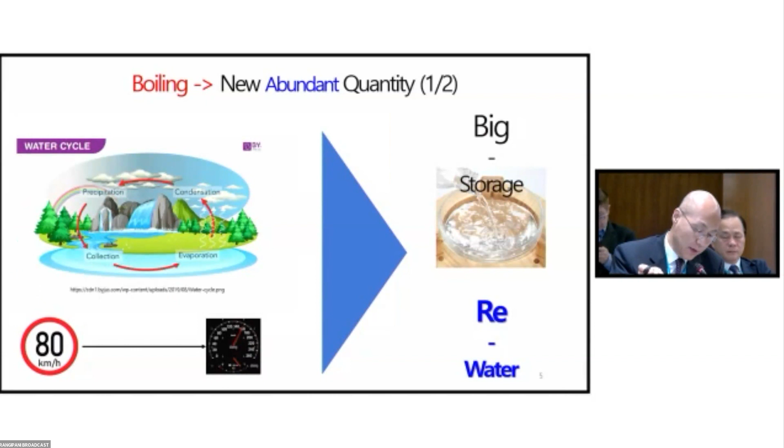Efforts are being made to reuse used water as a method to secure water resources, apart from the natural water cycle. I would call this produced reused water.

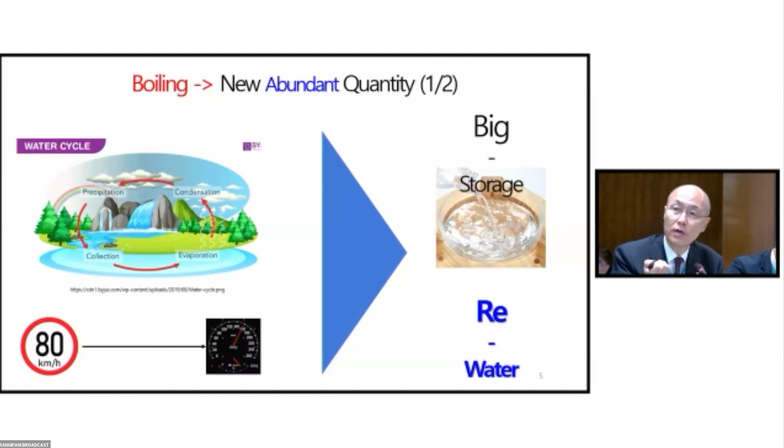I called this water re-water, and we try to keep the quantity of the water resources in the period of global boiling. We should use two methods. We make the big bowl, and the second one is we reuse the used water, which is called re-water.

To solve this issue, we need to increase the water storage capacity. There are 2 ways for this. One is to increase the number of water bowls and the other is to enhance their individual volumes: volume up, and increase the number of bowls.

And next, let me talk about water quality, new safe water quality. What would happen to water quality if the Earth is boiled over? Hot temperature would affect the aquatic system. I thought, what is happening when the river has a hot temperature? Which are the most utilized water resources?

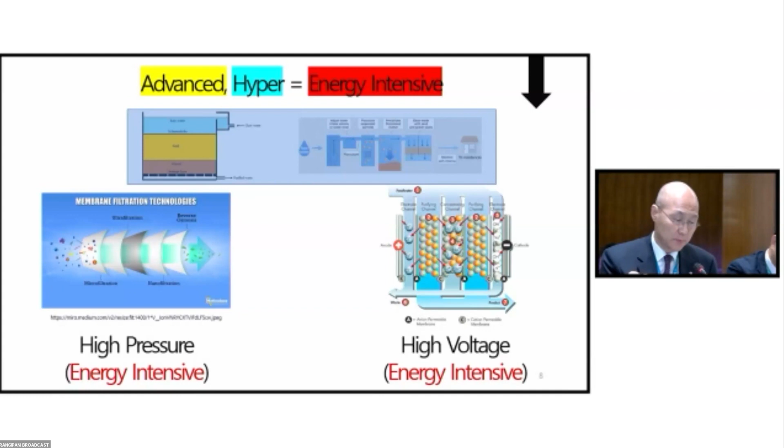And I think global boiling affects water quality more than quantity. To produce safe water, energy intensive processes are needed. In the global boiling era, I think research on water treatment technologies that use energy efficiently is needed to ensure safe water quality.

We water quality specialized engineers should catch two rabbits. One rabbit is safe water quality, and the other rabbit is the energy efficient water treatment process. But it is very difficult to catch the rabbits simultaneously. However, in other countries, for example Germany, they say throw one stone, catch two flies. So it's the same thinking.

And one more important thing about water. The most important thing of water is to flow well, and other important components are abundance, constancy, stability, and non-stop.

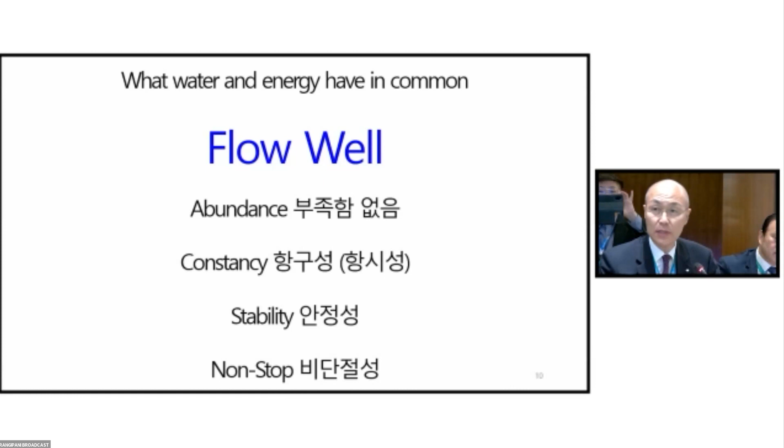And regarding energy in the water treatment process, I think the energy core in water treatment is the pumps. The pump plays an important role in achieving the most important component, flow well, without problems. However, pumps consume about 47% of the energy in the water treatment process. So to achieve energy efficiency, efficient energy use in pumps should be most important.

Generally, in lots of water and wastewater treatment, pumps use AC nowadays. However, with increasing renewable energy production, lots of pumps change from AC to DC. So water engineers consider how we use DC pumps.

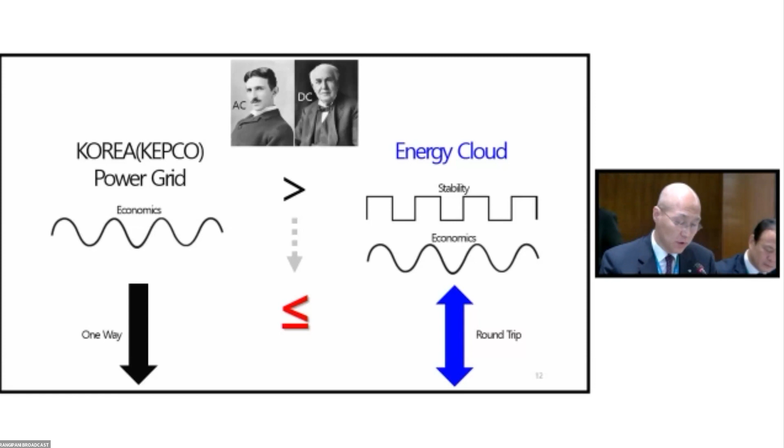So in order to reduce global warming, energy production based on fossil fuel decreased. Various technologies of renewable energy production are being developed and used. So the usage percent of DC increased gradually. I think that in the electricity energy area, we water treatment specialists should consider how we utilize DC in water and wastewater treatment plants.

And Seoul has 6 wastewater treatment plants and 5 water treatment plants. These plants consume 30% of the city public sector electricity. I think the situation would be similar in ASEAN countries. I believe that wastewater treatment plants and water treatment plants need to keep pace with the period of non-fossil based renewable energy.

And this is the water treatment plant and wastewater treatment plant. Nowadays, this is a one-way energy supply system. A big fossil fuel-based energy production facility gives the energy to the water treatment plant and wastewater treatment plant. However, owing to the increase in renewable energy production facilities, the water treatment plant and wastewater treatment plant also receive renewable energy.

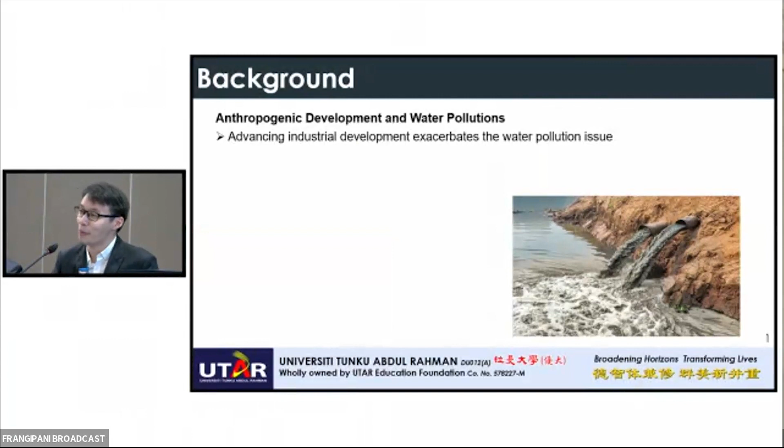So undeniably, we hope that advancing industrial development can actually help to solve most of the water pollution issues. But ironically, we also found that with more and more advanced industrial development, there's more and more water pollution occurring nowadays. So why is it so? Some of it is that new threats are discovered, due to new forms of pollutants coming out, and also an increase in concentrations. Previously the concentration might be too low to be noticed, but as more and more materials or chemicals are used, its concentration increases until it reaches a critical level.

And also, of course, with advancement in technology, we have new detection and separation techniques, which allow us to better separate these kinds of chemicals or pollutants that were previously unknown. So the three main emerging pollutants that I'm going to focus on are types that are currently the main issues we want to solve. One is the engineered nanoparticles. There are a lot of nanoparticles now being used in various applications, and the continuous usage of these materials can actually constitute a water pollution issue.

The second one would be what we call endocrine disrupting contaminants, EDCs in short. These are dangerous contaminants as well, since they can cause a great effect even at a very, very low concentration. And the last one is the persistent organic pollutants, which we call POPs. These can also be found almost everywhere in our life. So these are the three main pollutants. I'm just going to briefly introduce these pollutants. First one is the engineered nanoparticles.

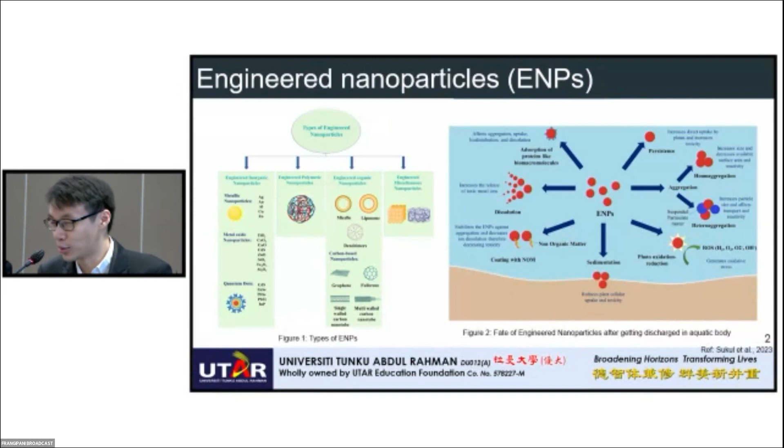If you look at these diagrams, you can see that engineered nanoparticles, when entering our aquatic bodies, can produce a lot of different pollutants and create some hazardous issues as well. Then the next one is what we call the endocrine disrupting contaminants. Again, they can be found almost everywhere in our daily life, from personal care products, drinking water, canned food, cleaning products, etc. So they exist everywhere.

They have potential adverse effects even at very low concentrations, and can have delayed effects. One thing that makes this kind of pollutant difficult to detect is that its effect might take years or even affect multiple generations, due to its effect on the body's hormones and responses. So it can cause irreversible health damage, and lack of adequate detection method enforcement is the main issue there, where we're unable to detect it properly in our wastewater.

Then there is also what we call the persistent organic pollutants. As its name says, this kind of pollutant is persistent and can accumulate in our whole ecosystem, and then it can bring toxicity, affecting our human health and environment. So among several characteristics of POPs, as you can see, they possess toxic characteristics.

They're persistent in the environment, meaning they can exist for a very long time without being degraded due to their high stability. They can bioaccumulate through the fish and marine life that have been consuming all these POPs, and they can then transfer into our human food chain as well. So it's one of the issues.

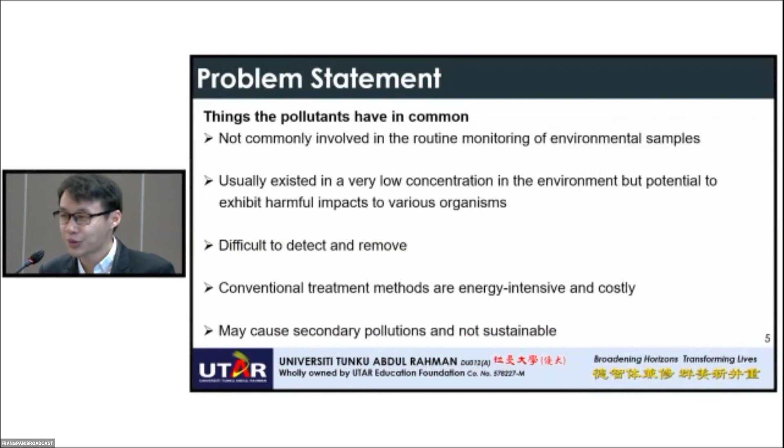But they can still cause great harm to various organisms in our ecosystem, and they're difficult to detect and even remove. Conventional treatment methods work, but they're either energy intensive or very costly. And some treatment methods like advanced oxidation might cause secondary pollution and are not sustainable in the long run. So that's why we came up with this phytoremediation process, a more sustainable and green technology to remove all these pollutants.

Phytoremediation is basically a plant-based approach, where we use the natural abilities of plants to remove these kinds of pollutants from the contaminated environment, either soil or water. It works with many different types of pollutants, and with emerging contaminants it has been found to be particularly effective because they exist at low concentrations. It can also limit the pollutant from spreading, because the plants hold these pollutants in place, resisting wind, rain, and groundwater flows.

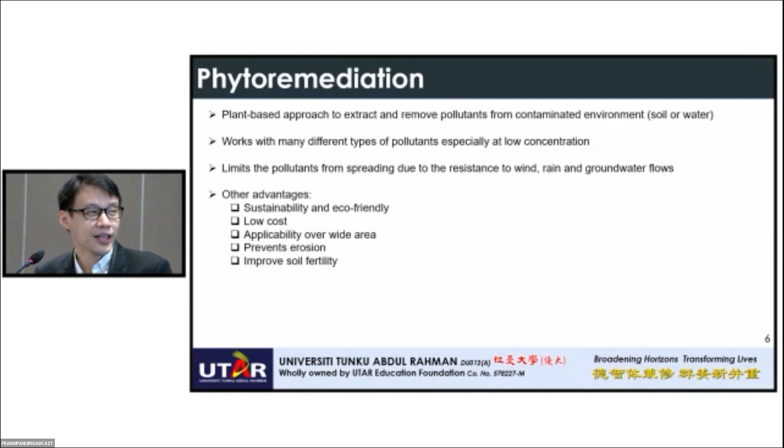And of course, it has other advantages, such as being more sustainable and eco-friendly. It's basically a plant approach, and the energy comes from sunlight, so it's very renewable and low cost as well. And it can be applied over wide areas. And using plants can help to prevent erosion in our soil and improve soil fertility as well.

One real example of phytoremediation in use is the cleanup of the Aberdeen Proving Ground in Maryland, USA. This ground was previously used for burning industrial and warfare chemicals from the 1940s to 1970s. But through planting poplar trees at the phytoremediation site, the contaminants were reduced by up to 85% without any additional cost, just by planting these plants there. So again, it proves that it's effective over a wide range of areas.

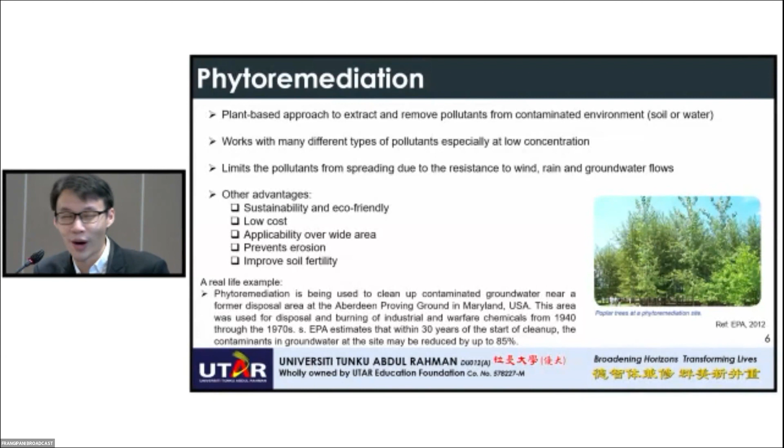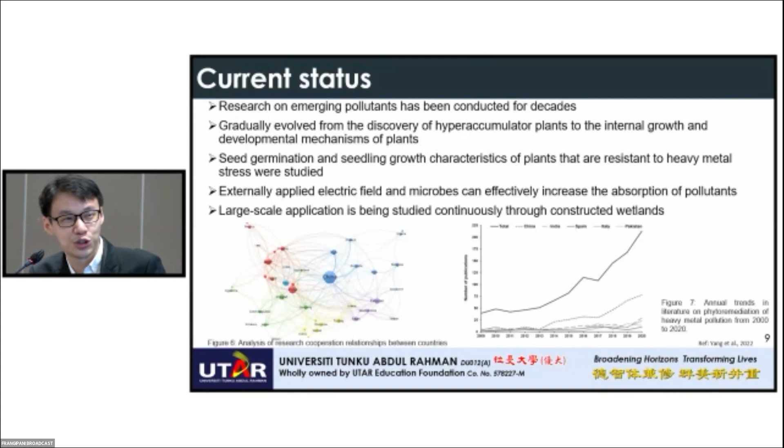On the issue of constructed wetlands, we're talking about large-scale phytoremediation applications. Phytoremediation modules used in wastewater treatment installations are specially designed wetlands containing aquatic or marsh plants. There are different types of flows that allow the constructed wetland to work. Generally, constructed wetlands consist of a reservoir, suitable filter materials, and planted vegetation.

Constructed wetlands basically employ floating aquatic vegetation, or they can also employ a chain of several ponds with a primary stage of mechanical wastewater treatment, so that they can coexist with our current conventional wastewater treatment process.

To replicate natural conditions so we can achieve optimal remediation of contaminated water, we can employ a combination of plant species. Not necessarily just one or two specific ones - we can have combinations that target a wide range of pollutants together, creating a synergistic effect within the same system for greater efficiency.

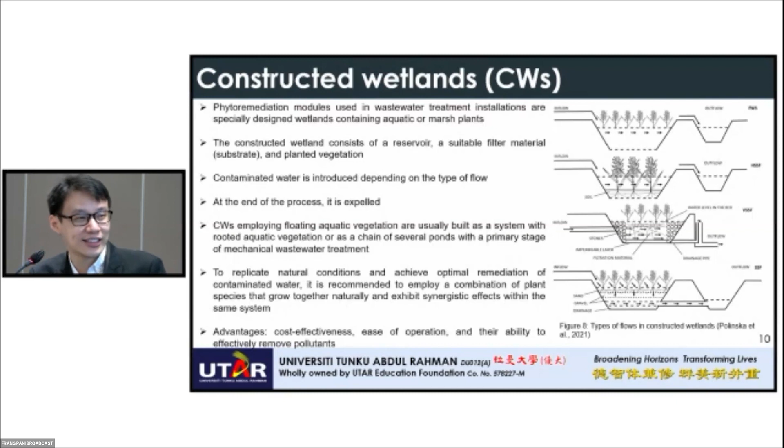Okay, so these are the introduction of the phytoremediation. Now, a bit of the info of my current research on phytoremediation.

Basically, this is one of my projects which we are focusing on removing the nickel 2 ions, which is a popular heavy metal in industrial wastewater. So we want to see how we can remove these nickel 2 ions through phytoremediation.

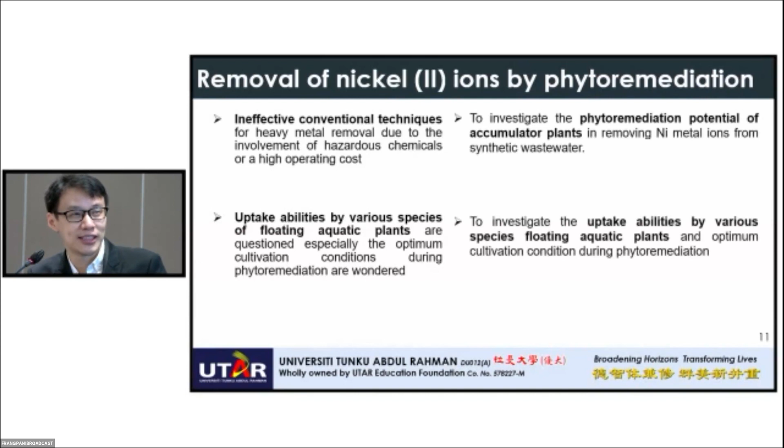We embarked on this research due to the ineffectiveness of conventional heavy metal removal techniques. The uptake abilities of various species for nickel ions are still quite unknown, so we want to explore further and investigate the potential of different accumulator plants, specifically the uptake abilities of various floating aquatic plant species toward nickel ion removal.

These are the few methodologies we're using: plant preparation, and we prepared synthetic wastewater containing nickel ions. Then we studied different parameters, did some characterization studies, data analysis, and lastly kinetic and isotherm model studies.

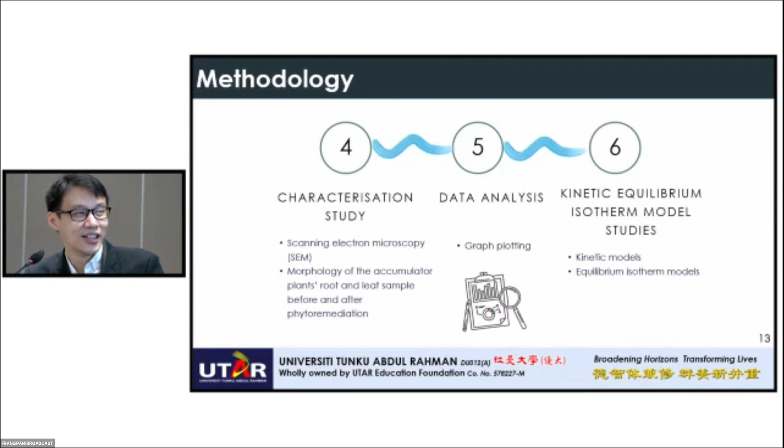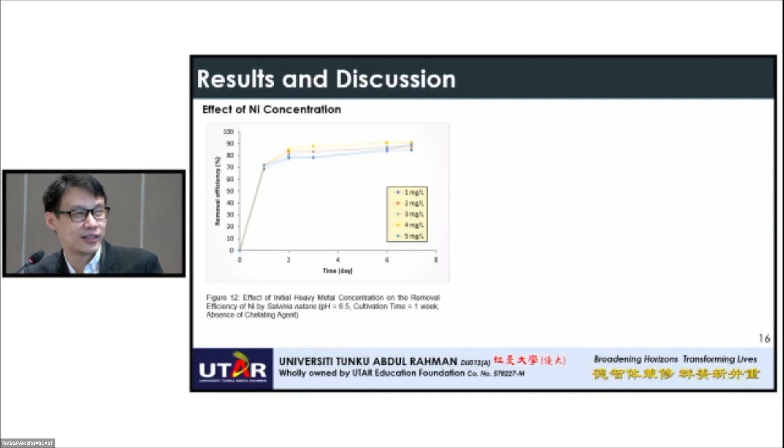On the effect of nickel concentration, we varied different concentrations and found that the best concentration it works with is under 4 milligrams per liter. Higher concentrations will result in poisoning of the plant growth, so this is the limit the plant can take for nickel concentrations.

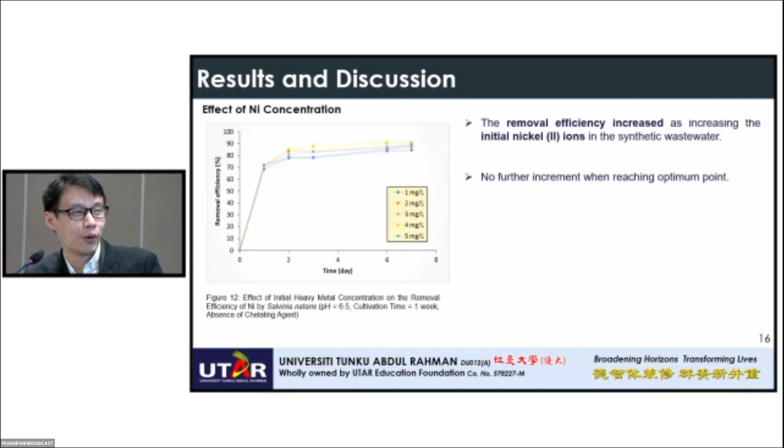The removal efficiency increased with increasing initial nickel 2 ion concentration, with no further increment once reaching the optimum point of 4 milligrams per liter. Above this level, we found oxidative stress occurs, affecting the membrane permeability of the plants. This resulted in the resorption transport mechanism being inhibited, causing lower plant uptake.

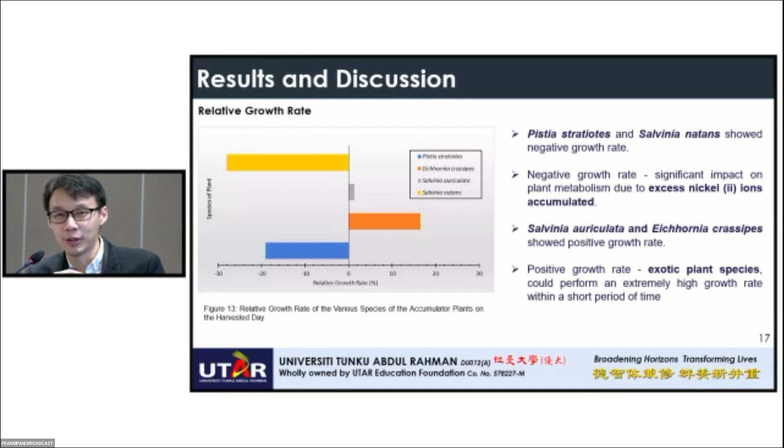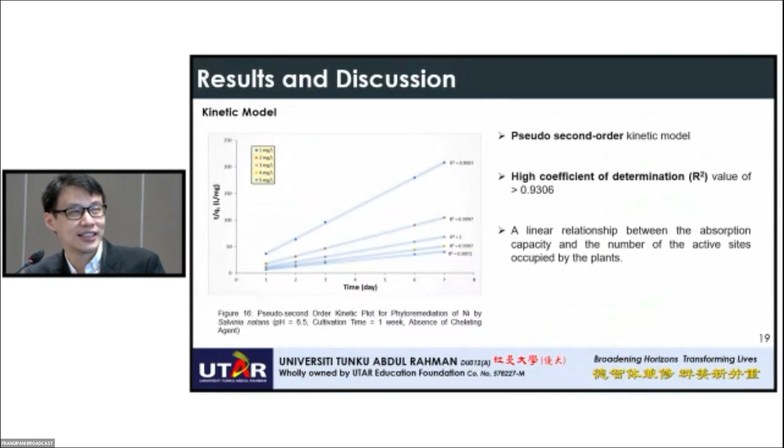These are the kinetic models we investigated to study further how we can improve the kinetics—basically a pseudo second order kinetic model. For the isotherm model, we discovered that the Freundlich isotherm model suits best to describe the phytoremediation process.

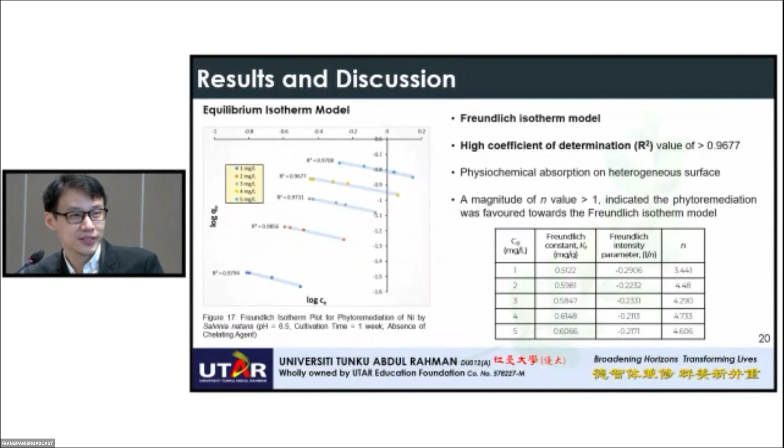For the potential of phytoremediation in general, phytoremediation can remove pollutants using plants from a few percentage to almost 100%, as with the nickel ions I showed earlier. This depends on the types of plants used, structure of compounds, concentration, and plant density. What makes this attractive is that it's a simple process, low cost, and particularly effective for developing countries.

But of course it has its drawbacks, where it's a time-consuming process. If you need the plant to remove a lot of these pollutants from the contaminated site, it takes quite a long time to do as well. But with further advancement in technology, we believe this can be sped up.

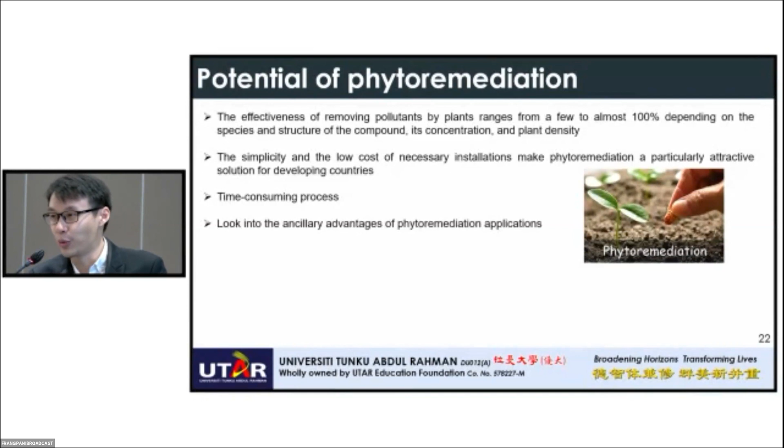We also have to look at the ancillary advantages of phytoremediation applications. For example, after the plant grows, we can use the biomass created for other types of biofuel processes. Our research group is also studying how, after extracting pollutants using the plant, we can extract the pollutant from the plant itself and reutilize it in other areas. These are other ancillary advantages we can see from this phytoremediation process.

Application of genetic engineering approaches is also one way we can further improve phytoremediation efficiency. Further understanding of the mechanism will be important to fulfill the maximum efficiency of phytoremediation. Study of chelating agents and microorganisms can also help improve its efficiency. These are basically the future directions our research group will be working on.

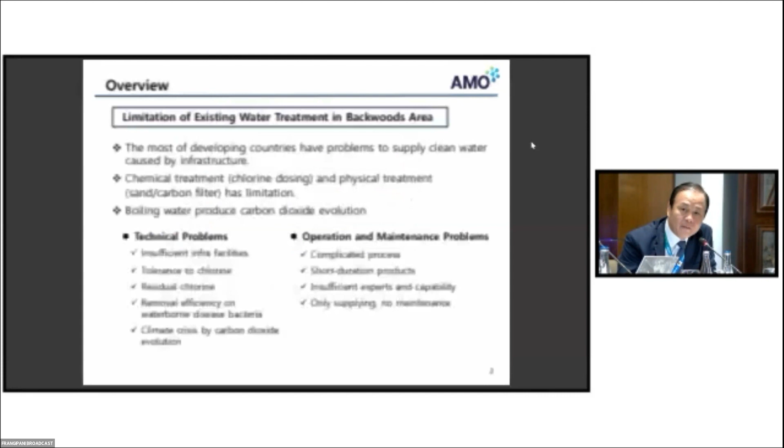Oh, it's the old one. Okay, I'll use this one.

Anyway, there is some limitation, like in supplying drinking water. In such places, they usually use chemical treatment and physical treatment, and in some cases boiling water process. Anyway, it's difficult to remove some waterborne pathogens like bacteria or virus. So we must find a way to overcome technical problems like insufficient infrastructure, and also overcome maintenance problems.

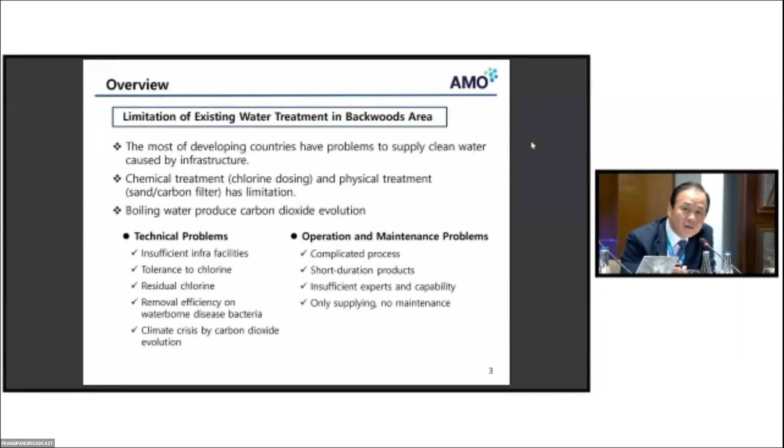Dr. Sang-Yeol already said that using membrane filtration needs very high energy - it's a high energy intensive process. So it's very difficult especially for places with insufficient infrastructure. So I introduce the non-powered GDM water treatment system. GDM means gravity-driven membrane - without electricity we can purify the water.

We need this raw water - we need a GDM filtration tank. Inside we install gravity membranes. The principle is like this, only by gravity - gravity means the hydrostatic pressure between the gravity-driven membrane and the water level. Using the GDM filters by gravity, from source water we can get clean water using the GDM filters. Next I will introduce more in detail.

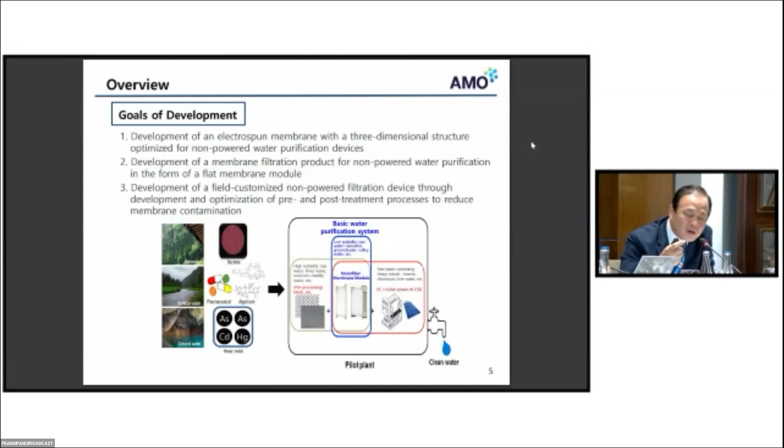Our target, I will summarize in three parts. One is the development of electrospun nanomembranes, and second, using these electrospun nanomembranes we developed membrane filtration systems like GDM, and in some cases, depending on the raw water, we need some kind of pre-treatment or post-treatment. So based on our GDM filtration systems, we can add some kinds of systems before or after, depending on the raw water.

So it means that using this kind of nanomembrane, we can filter out something and pass water through the nanofiber membrane. So our idea is like this. First, we must filter out some kinds of pollutants, so we need a very small pore size, but we need more quantity, so we need higher porosity. So using this kind of nanofiber membrane, we can filter out very small contaminant particles and also allow a large amount of water to pass through. The porosity is more than 80% in this case.

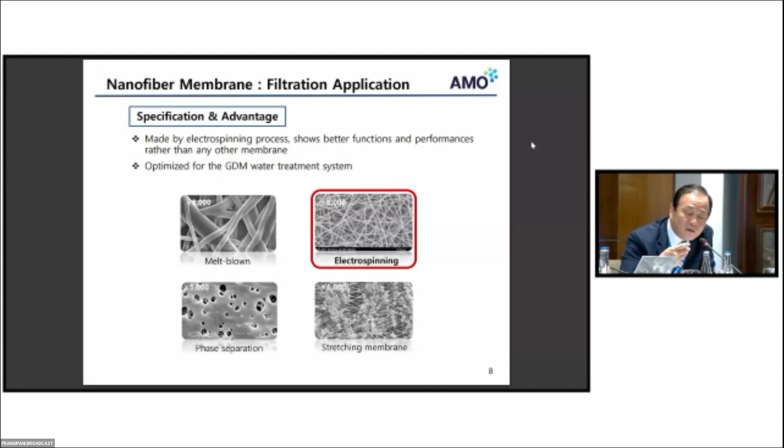So you can see various kinds of nanofiber membranes using various kinds of manufacturing systems. This is the nanofiber membrane made by the electrospinning process. The nanofiber membranes made by electrospinning process are in this case optimized for GDM water treatment. GDM means without electricity, you can purify water.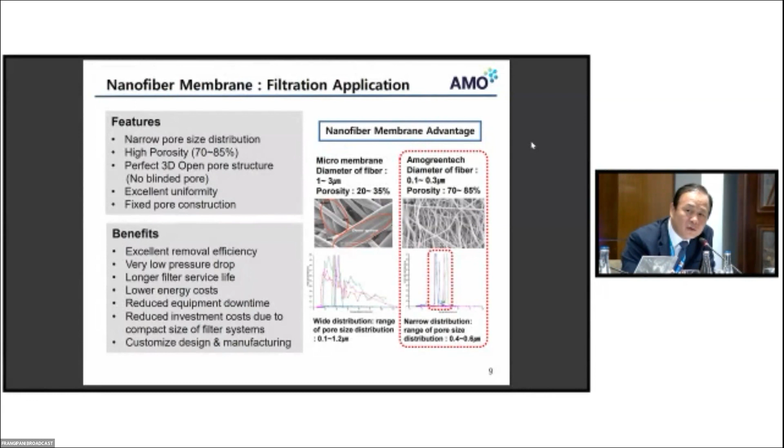So as you see, using nanofiber membranes has many kinds of benefits, features like the narrow pore size distribution, and the porosity is generally more than 80%, and also, next I will show you, excellent removal: we can easily remove some kinds of bacteria or viruses. In these figures you can see the very narrow, very uniform distribution of pore size.

I already mentioned the electrospinning process. In the electrospinning process, we apply high voltage to liquid polymer solutions, and then we get a fine jet from the needle of a syringe pump or something. So our company started this kind of R&D around 20 years ago.

Please show the... Okay. Sorry. Oh, sorry. There is just some kind...

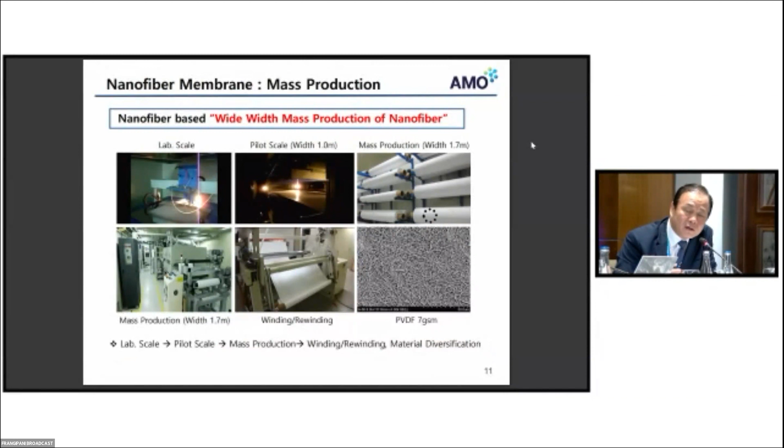Anyway, we set up lab scale and pilot scale, usually 1.0 meter width, and also we set up lines where we can produce nanofiber membranes with a width of 1.7 meters. This is the final product.

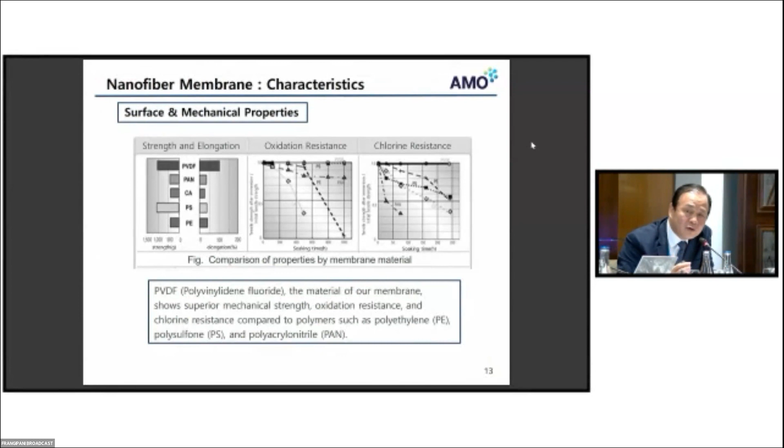To make nanofiber membranes, first we must select what material is best for GDM filters. So we tested several materials like PDF, PVDF, PAN, in some cases PS. You can see the tensile strength and elongation. In this slide you can see PVDF and PAN show better properties compared to porous film structure. And also we compare strength, elongation, oxidation resistance and chlorine resistance, because raw water contains materials like chlorine. So PVDF shows better properties compared to PAN, PE or other materials, so we selected PVDF to make nanofiber membranes.

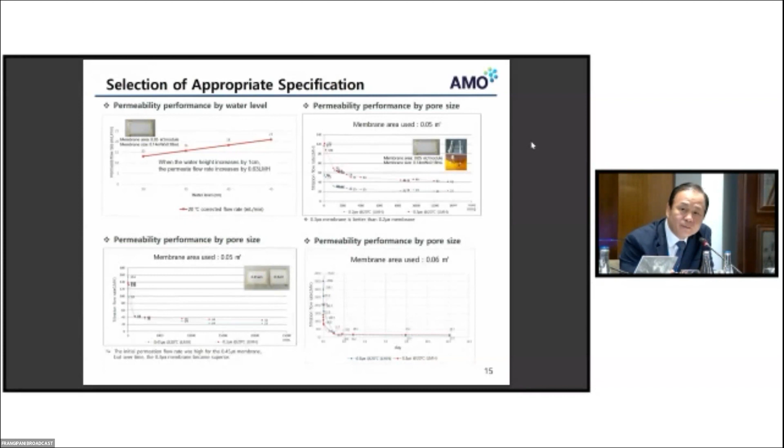As a result, we could find the pore size is around 0.3 micrometer. In this case, it shows a very high, better filtration flow rate. And in this case, we can explain it according to the membrane fouling models like this. First, it depends on the pore size increase, but above 0.3 micrometer, it slows down. So we can explain this kind of phenomena using the membrane fouling models like this.

And also, as I already mentioned, the most important thing is the removal of bacteria. So in some organization, they tested depending on the materials, PVDF, and the pore size is 0.2 micrometers, 0.3, and 9 GSM, which means the thickness or density of nanofiber membranes. So anyway, we tested, and 0.3, 9 GSM membranes can remove almost all the bacteria. So we decided our nanofiber membranes' pore size is 0.3 micrometer and 9 GSM.

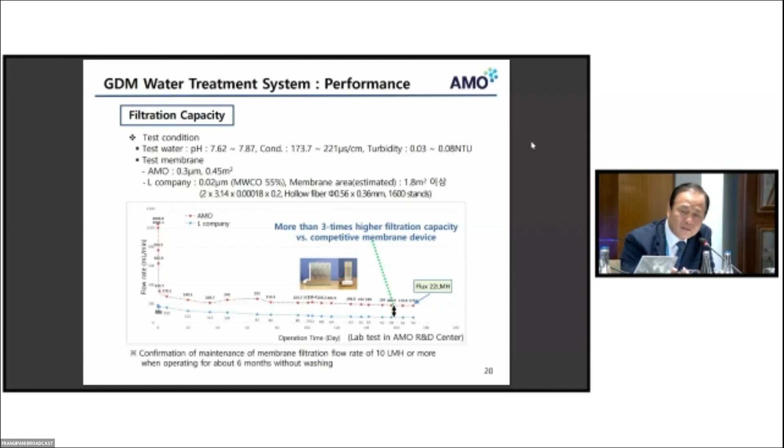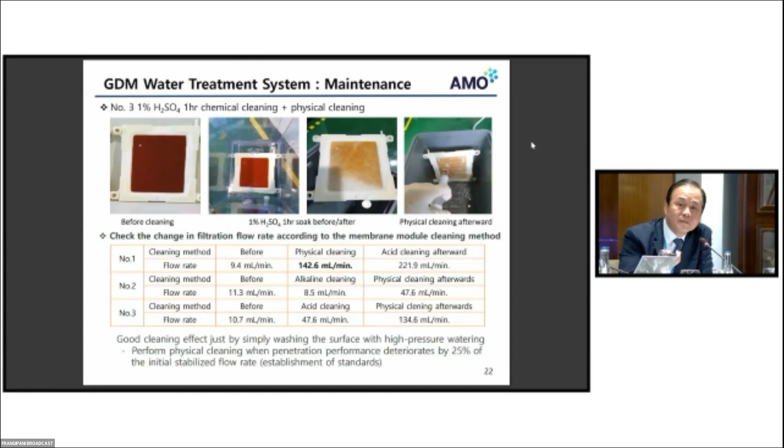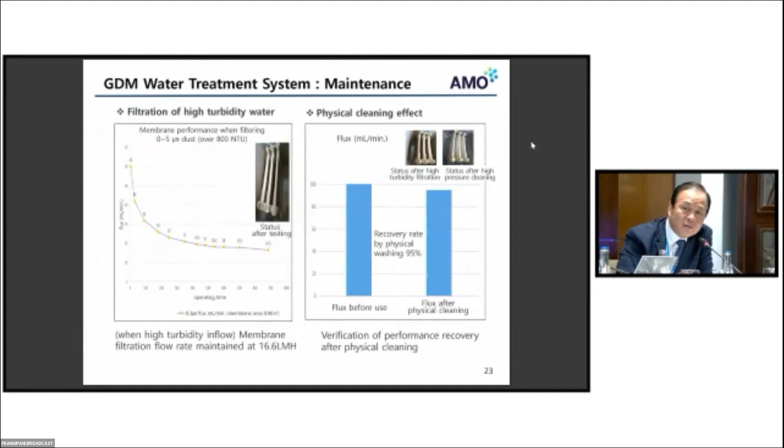And also in the case of high turbidity water, like after rain, it also shows similar properties, and using very simple physical cleaning, we can find the recovery by physical washing is more than 95%.

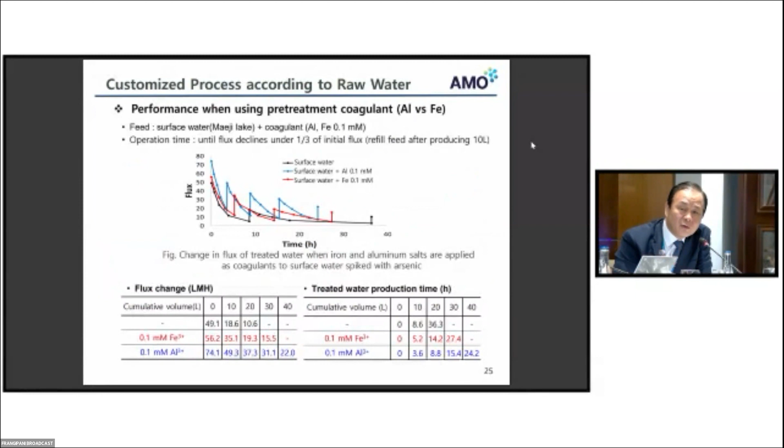And also we checked the arsenic removal using coagulant, like I already mentioned, iron salt or aluminum salt. Depending on the contents of iron salt, you can find the removal of arsenic or some metal components. And depending on the amount of voltage, it also shows the same phenomena. So usually I can say that the efficiency of EC is more effective. It means that you can very easily remove the arsenic, etc.

And finally, I would like to talk about the field verification in Korea and overseas. Generally, our field verification is done together with Korean Water, which is the government organization for treating water and wastewater. So in this place, the problem depends on rain. The turbidity changes. Normally there is no problem, but after rain, there are some problems.

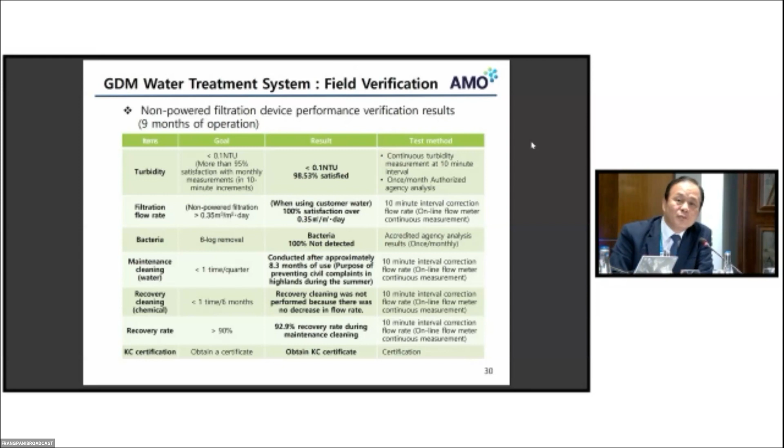We made some GDM unit production and installation, and finally we installed the real-time water quality monitoring system. So we checked many kinds, more than 9 items. We checked the turbidity, filtration flow rate, or something. So we could find turbidity is very low, and also filtration is high, and bacteria around 100% not detected, like this.

And also for overseas, we made 2 kinds of our systems. One is small systems. The small system is more than 30 liters per day, and the large system is more than 100 liters per day. We prepared the 2 kinds of systems, and overseas in Indonesia, I remember North Sumatra, Pekanbaru. Do you know? Maybe Pekanbaru. North Sumatra. So we tested in this area. We tested a small system and large systems.

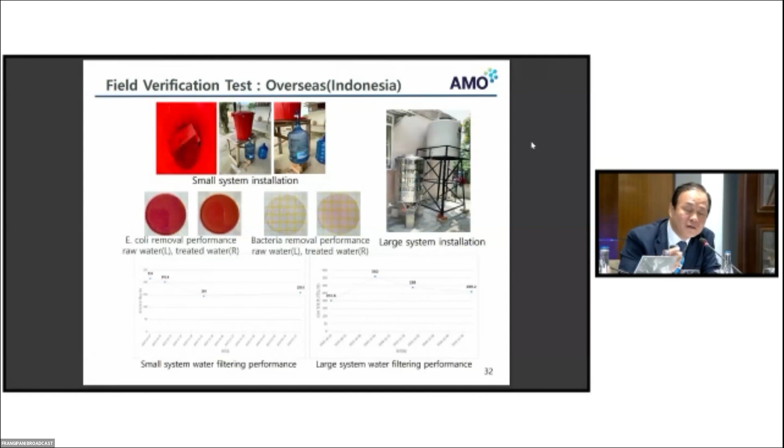Already I mentioned 2 points. One is flow rate and removal of bacteria. You couldn't distinguish it, but anyway, we could find the removal of bacteria, and the flow rate is above our target flow rate. And also in Uganda and Myanmar and Tanzania, we tested our small systems. Also, we checked the removal of bacteria and the flow rate. In every case, we could gather satisfactory data from that area.

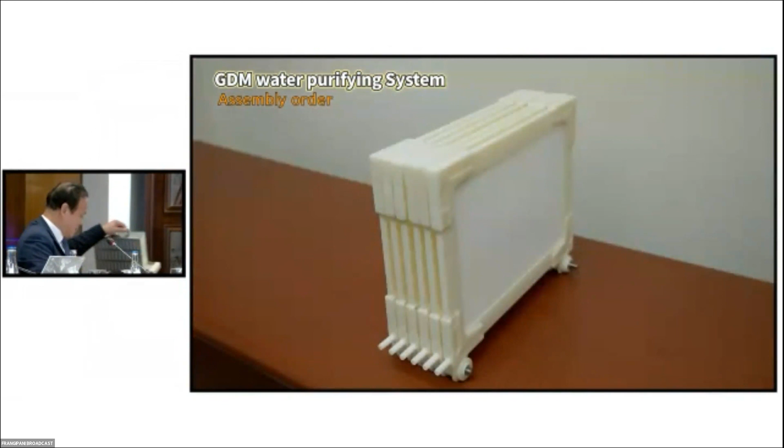This is our module. So I prepared some pictures, the movie. Yeah, please. Yeah, okay. This is the real model. Already I mentioned it's around 4 to 5 liters per hour, the small systems. And also I prepared some brochures, so please use it.

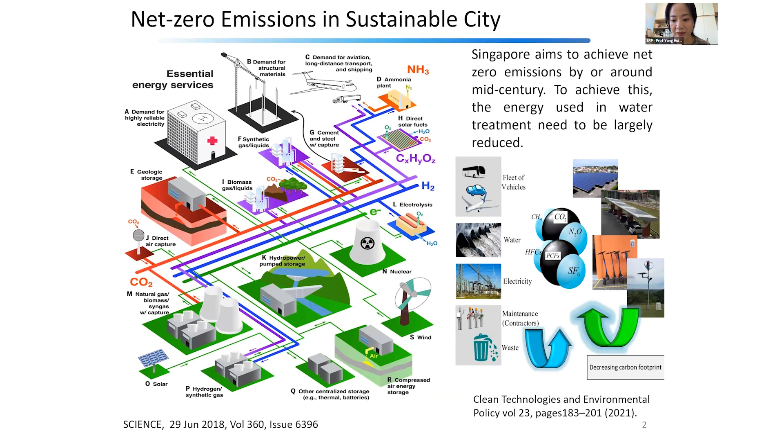So let's review a little bit the current energy being utilized for desalination and water treatment. There are a few groups of technologies that have been utilized for low energy or high energy water treatment. For example, the first group is membrane technology. There are different types of membrane, for example, reverse osmosis, electrodialysis, and so on and so forth. And those membranes are actually very expensive due to the huge energy and infrastructure cost.

The second category of water treatment is the thermal-based water treatment system. Most of these thermal methods need additional facilities, heaters, pumps, and so on. And then there are promising alternative technologies for water desalination or water treatment. In this group, we have microbial desalination, capacitive deionization, ion concentration polarization, and so on. Those low energy water treatment technologies aim to reduce the energy consumption in water treatment to below 3 kilowatt hours per meter cube.

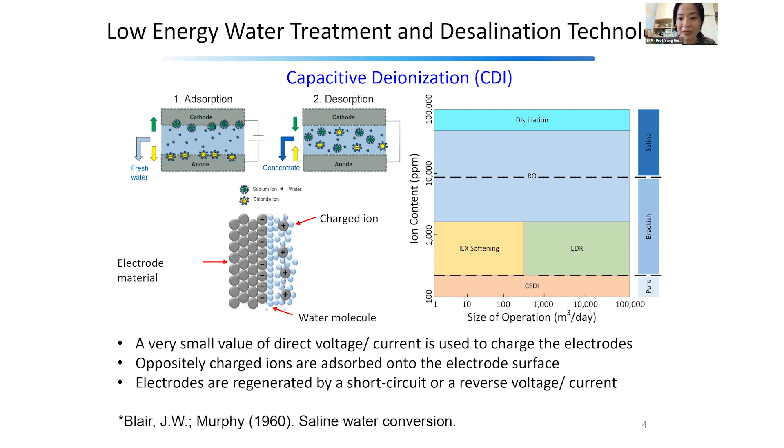And then for water within 1,000 ppm, sometimes around 500 ppm or below 500 ppm, we can actually utilize CDI or some similar method to do the water treatment. Since the start of our research group, we started to look for new materials for the electrode for capacitive deionization devices. We can see that there are many criteria for CDI electrode material design.

So for our group, we have summarized 5 main criteria for a highly efficient CDI electrode material. For example, high electrical conductivity, large surface area, a favorable pore size distribution, good wettability, sufficient ion diffusion pathways, and so on and so forth.

And there are very dynamic modeling approaches for the CDI process as well. For example, you can model the CDI process based on the voltage distribution, initial condition, computation for surface charge density, and so on and so forth. And then with these criteria, we have shortlisted carbon nanofibers, graphene, and also the 3-dimensional structure with a carbon hollow structure as electrode for this CDI device.

However, even with those very high efficiency capacitive deionization materials, we can barely have around 10 to 20 milligram per gram absorption capacity for CDI devices. And the reason for that is that we have very limited capacity based only on the physical attachment of certain positive or negative charges on the surface of the electrode.

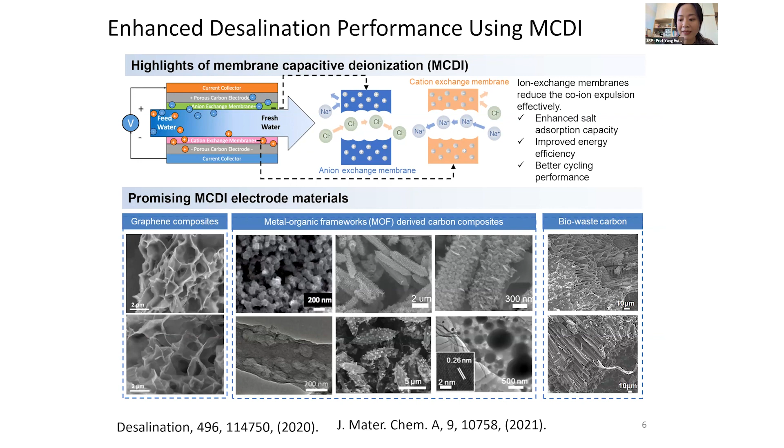And then after we have this anion or cation exchange membrane, we can see that our efficiency has been greatly improved for this membrane-based CDI device. After that, we can move the salt removal capacity from 10 to 30 to 40 milligram per gram. But again, this is still a very minimum level of salt removal capacity.

If we want to improve this salt removal capacity a little further, we need to fundamentally change the absorption capacity from purely physical based attachment of the ions to the electrode to some sort of chemical based reaction or absorption.

So what we have done is a new desalination design based on a hybrid asymmetric CDI design. On the carbon-based materials, we can choose, for example, activated carbon, CNT, or graphene oxide-based material. And of course, we know that the limitation for such carbon-based material is a low removal capacity.

And then for the hybrid asymmetric CDI system, we can have the absorption carbon material for chloride removal and the intercalation electrode for sodium removal. Based on this, we have capacitive materials with suitable intercalation layers, for example, MXene nanosheet material, sodium-based metal oxide with intercalation channels, and so on and so forth.

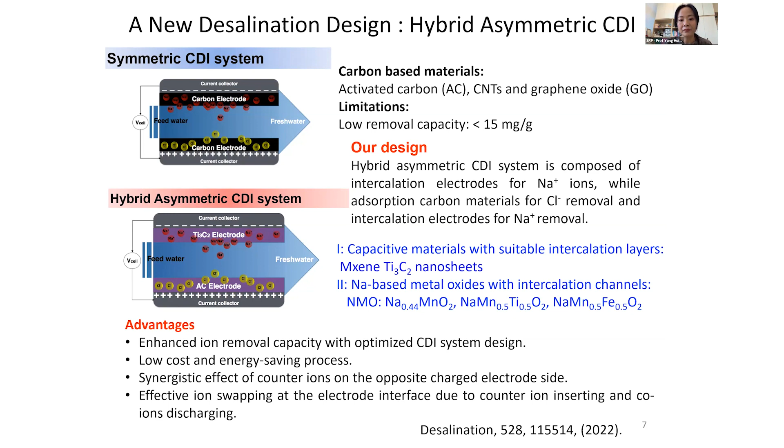With this, we can enhance the ion removal capacity with optimized CDI system design, a low cost, energy saving process, a synergetic effect for counter ions on the oppositely charged electrode, and effective ion swapping at the electrode interface due to the counter ion inserting and co-ion discharging process. With this, we can largely improve the salt removal capacity.

But what we want to do further is, beyond this hybrid capacitive deionization, one step further will be purely based on an electrochemical approach for both anode and cathode. So we move from the original capacitive deionization device to the membrane capacitive deionization process, then the hybrid capacitive deionization process, and eventually the electrochemical deionization process.

We enable the enhanced ion selectivity towards only sodium or only chloride, favorable towards seawaters with high salinity level and multi-ion compositions, high degree of freedom in terms of forms and scalability, and also free control of the desalination energy storage capacity with smart design for nanomaterials. And we can also have this nano switch obtained with precise crystal configuration and vacancy control in this 3D structure of all these ion selective electrodes.

So with this, we actually design our mechanism, which is called desalination battery. The original purpose is to desalinate the seawater by an electrochemical process. But when we have the electrochemical reactions for both anode and cathode, we realize that we can actually release those ions out when we want to start the process. And in this releasing process, we release the ions and also release the charge, and this is actually a battery function. Therefore we name this device a desalination battery.

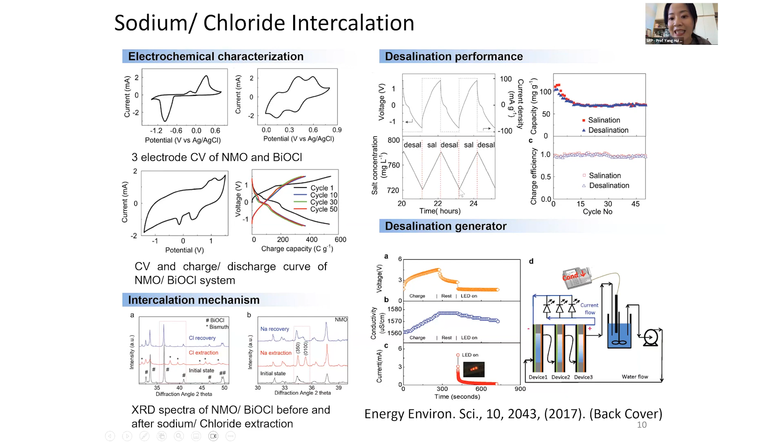And then we can have both sodium and chloride have this intercalation reaction with the electrode. For example, for sodium you can use NMO based material, and for chloride you can use a bismuth oxychloride based material. And with this, you can realize desalination by removing sodium and chloride, and also generate electricity or release those ions when you discharge this desalination battery or desalination generator.

Our future goal is to realize a desalination battery that uses electrodes to engage in specific reactions with sodium and chloride. Seawater functions as an electrolyte, and desalination can be analogically treated as charging a battery to store sodium and chloride ions. It's a sustainable and low-cost solution to meet the society need for both water and energy. We can utilize the same principle to remove other ions from seawater, not only sodium and chloride, for example, lithium.

So the lithium can be extracted by a fluidic electrochemical system based on this seawater desalination or ion removal fluidic device. Lithium is very expensive. We all know that seawater contains more than 5,000 times as much lithium as the supplies on land. The current limitation is that this lithium concentration is too low, less than 0.17 ppm.

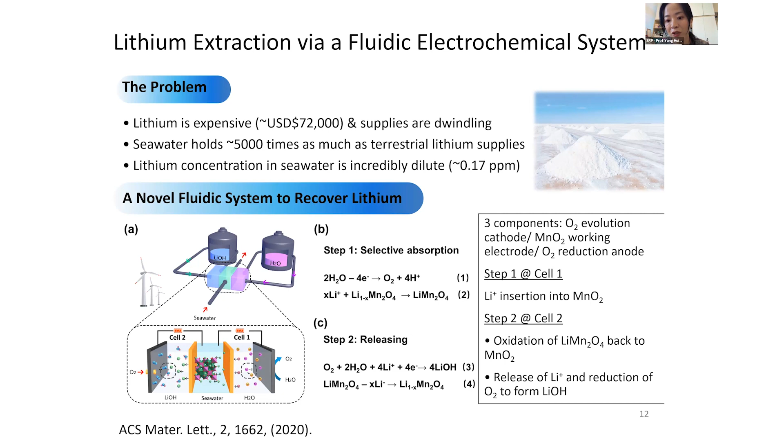So we design a 3-chamber system with 2 steps. First step, we have lithium inserted into this manganese oxide electrode material. Step 2, we oxidize the manganese oxide with lithium back to manganese oxide. After that, we release the lithium and reduce the oxygen to form lithium hydroxide. To highlight, lithium hydroxide is the material that we eventually utilize in the production of lithium ion batteries.

We can see that the delta G towards different materials are very different. With this lambda manganese oxide, the delta G is highest for lithium ion, which shows the material has a very high lithium selectivity. We can also see that the insertion potential is highest for lithium, which means lithium can be inserted into the system with many different competing ions, for example, sodium, potassium, and so on.

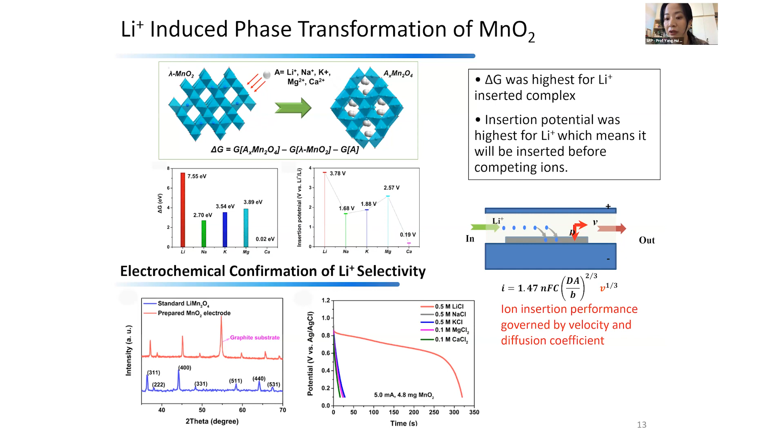The ion insertion performance is also governed by the velocity and diffusion coefficient. That's why you can control the lithium diffusion rate by utilizing different flow rates to generate a different diffusion coefficient. Lithium recovery in seawater is very challenging. For now, we can target concentrated seawater with 7 ppm lithium concentration, and the capacity for our electrode can be 20.6 milligram per gram within 45 minutes extraction time.

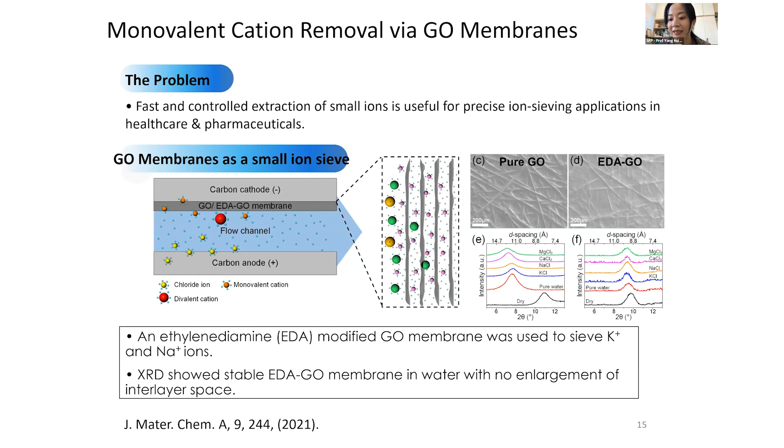We can also target other ions beyond lithium. For example, sodium or potassium and other ions can be selected and inserted into different electrode materials. For example, we have precise monovalent cation removal or collection with this graphene oxide membrane, targeting monovalent ions versus divalent ions. So we can have precise ion sieving targeting potassium ions and also sodium ions.

We can see that the monovalent versus divalent ion cation removal process is very different. These monovalent ions can be sort of only removed by this EDA-GO graphene oxide kind of electrode. The selectivity for potassium is as high as 4.2 versus magnesium, and the selectivity for sodium can be as high as 3.4 times when mixing magnesium together with those sodium ions.

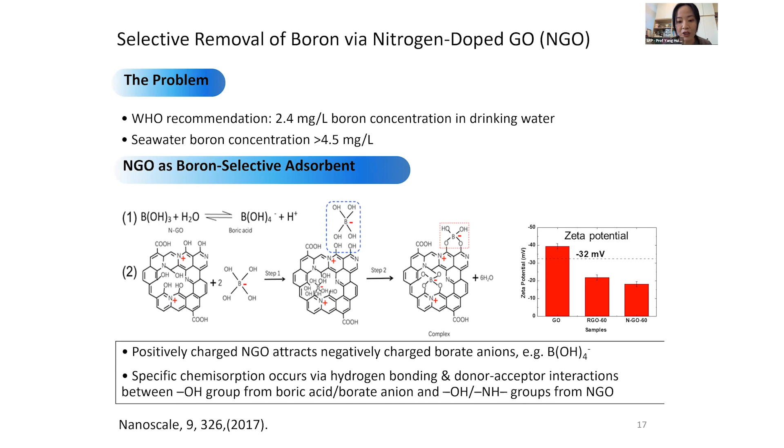There are totally 9 possible complexes identified, having nitrogen doped in different locations for this nitrogen doped graphene. We found that the highest chemical bonding energy occurs between one quaternary nitrogen atom and 2 adjacent hydroxyl groups in this combination for the nanocomposite.

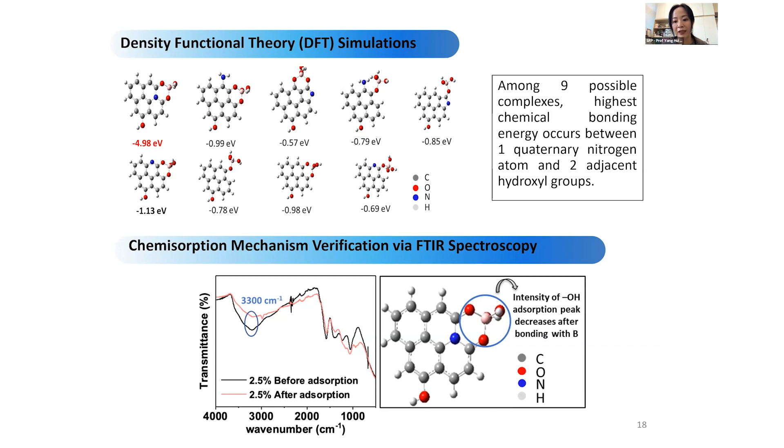The boron performance for NGO is actually 23 times higher than pure GO. The boron rejection rate for NGO, at 5 milligrams per liter boron concentration, is as high as 91%. The boron absorption capacity for NGO is 23 times higher than pure pristine GO, and in seawater conditions can be as high as 58.7 milligrams per gram.

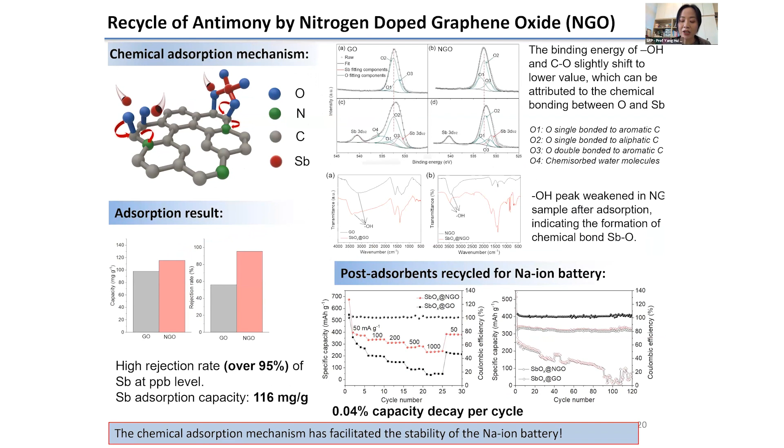We can also utilize the NGO for recycling other heavy metals like antimony. We have been working on using NGO to remove antimony for reuse in sodium ion batteries, so that we can collect the antimony and also reuse it for energy storage purposes. The rejection rate for antimony recovery can be more than 95%.

For application of our ion selective system or ion removal system, in the future we can utilize this ion removal, ion selective system in pharmaceutical applications, wastewater processing, precious metal recovery, agriculture, drug delivery, and so on and so forth. I believe there is a bright future for such technologies in many industry sectors, and our research will be contributing significantly to net zero emission, low energy utilization for water treatment and water desalination.

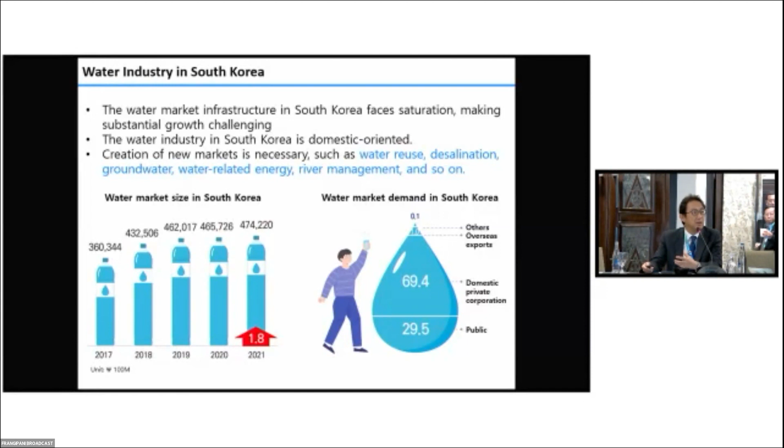It's a global number, and in Korea as well, the water industry - we think we saw some growth from 2017 to 2021. The market size grows, and we have the same problem. In addition, the water market infrastructure in South Korea faces saturation, making substantial growth challenging. We filled up our capacity but didn't meet our demand. So we need to do something new and find a way to modify what we used to do. Also, creation of new markets is necessary: water reuse, desalination, groundwater, water-related energy, river management. These are new fields which we didn't pay enough attention to, but we should pay more attention now.

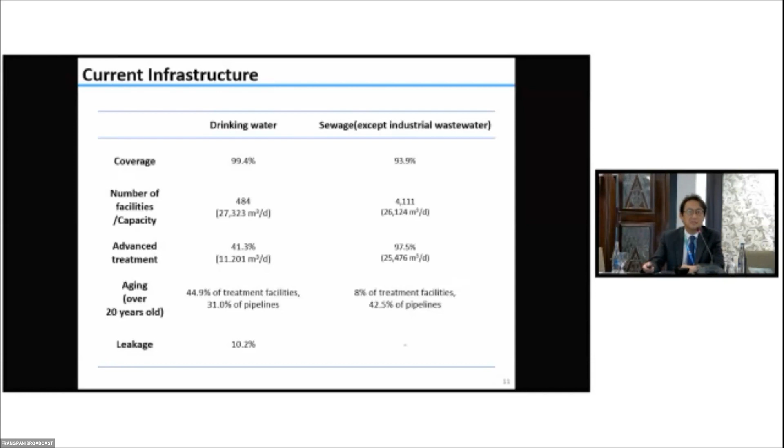Still, another problem—or I should say current status—is that for large-scale facilities, when we revamp our original facilities, we still depend on overseas products. Worldwide big name players for ozone or membrane produce very large facilities and have better experience, so in a way they have a competitive edge. In order to overcome that, we need to do more work.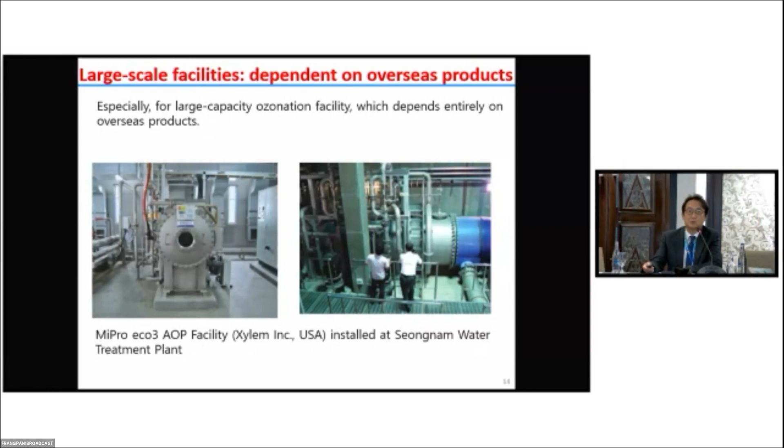So as you saw in the status of water and wastewater treatment in Korea, advanced treatment is a common word. That's something we have to work on.

Globally, looking at the advanced treatment market and players, they see the market will grow, reaching 3.55 billion USD by 2027. Driving factors are the increasingly stringent regulations all over the world—regulations become tougher and tougher. In order to treat those contaminants, we need something strong, and that's why they rely on these technologies.

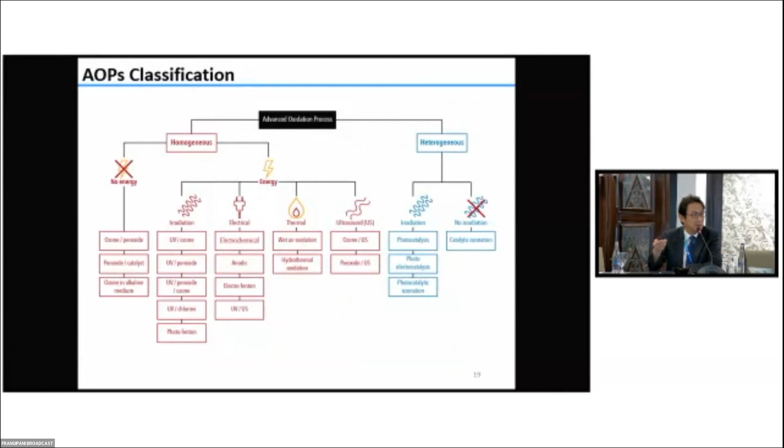AOP has different methods, whether homogeneous or heterogeneous, and there are various approaches. These need to be more developed and worked on. When we had seminars a couple of times this year, I saw Professor Lim and Professor Yang do excellent research in this field, so this is something we can work on together later.

Again, the main AOP technologies are Fenton, ozone, and photocatalyst. These are the processes and their limitations.

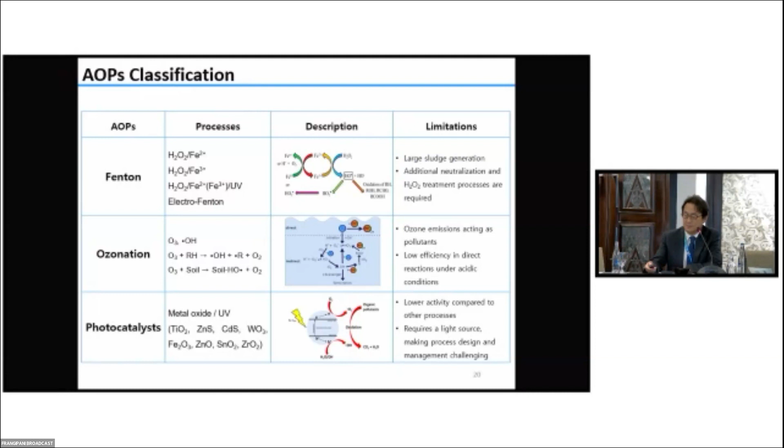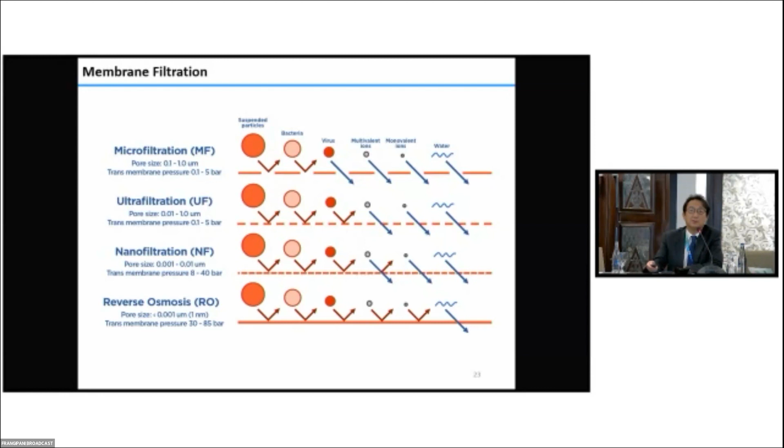Another new trend we should emphasize is membrane filtration. We saw Dr. Song and Professor Yang give excellent presentations on membrane filtration—whether MF, UF, NF, or RO, all are widely used. Commercial large-scale membrane filtration systems are led by big players such as GE from the US, Siemens, Norit from Germany, and Asahi Kasei from Japan. But the market for precision filtration membranes will gradually expand, so there will be chances for others besides these major players. The membrane filtration market forecast to 2025 or 2028 will increase.

In Korea, in response to the current situation, we are trying to see some different membranes, maybe smaller scale membranes, as Dr. Song showed us, or specific applications of the membranes are researched, and we are trying to develop new technologies in this field. For example, high concentration wastewater treatment, high permeability and high strength hollow fiber membranes, and low energy, non-polluting precision filtration, next generation separation membranes and modules for drinking water. These are where we want to do more research and more products from the Korean side.

So based on this, what can we do together? I believe three parts. The first part is treatment facilities, conventional treatment facilities. Again, in Korea, we need to design and revamp, and we need to rebuild these facilities. In engineering design and construction, we can share our experiences. As I told you, we have a market in Korea.

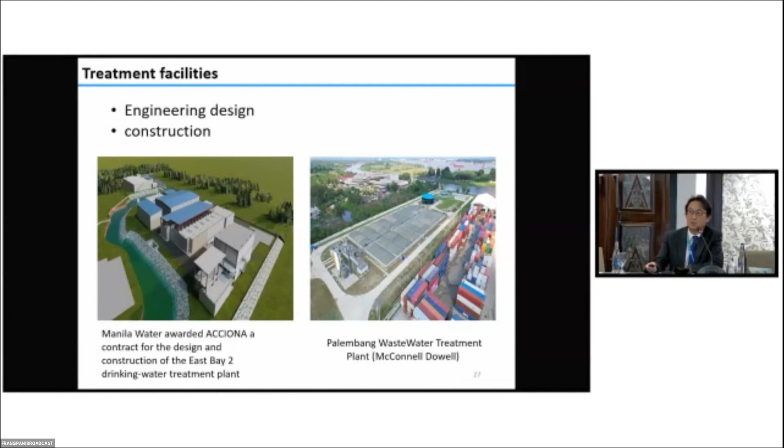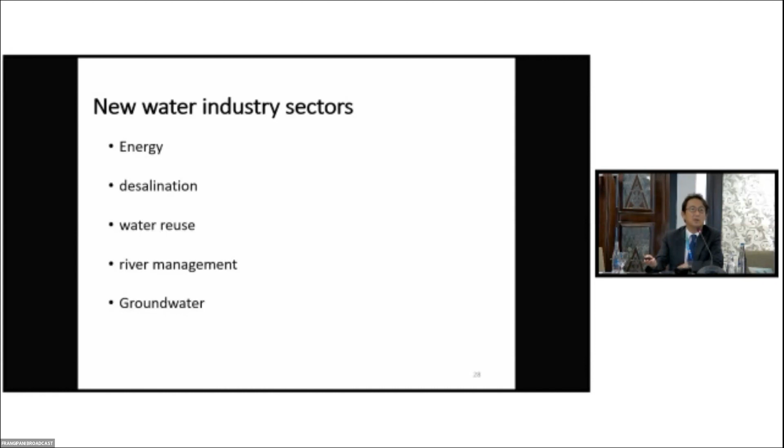And another part we can work together on is the new water industry sectors. As we define the new water industry, these fields: energy, desalination, water reuse, river management, groundwater, which I think we can work together on. In some parts, I'm sure ASEAN has more experience than Korea. In some parts, we may have more experience. I think we can do some research. In this field, I think it can be between researchers and researchers or researchers to industry. We can do some collaboration.

Desalination is needed all over the world, actually, wherever water is needed and where seawater or brackish water is nearby. With abundant coastlines in the ASEAN region, there is significant potential for membrane plants to be the major source for the demand. Maybe you are okay now, but later on, when you need more water, membranes can be a very good option.

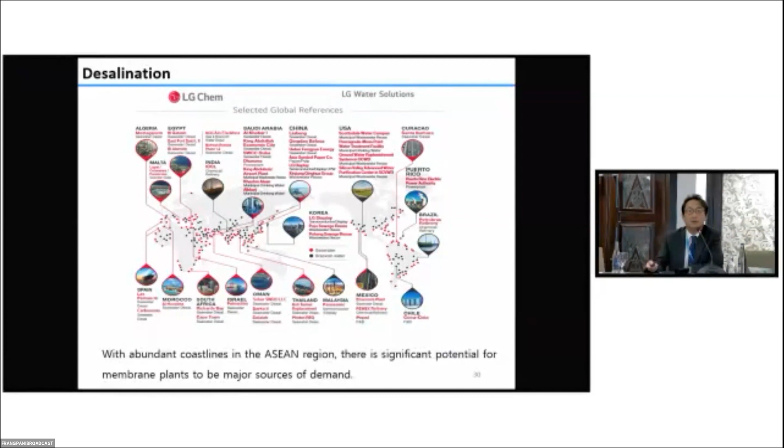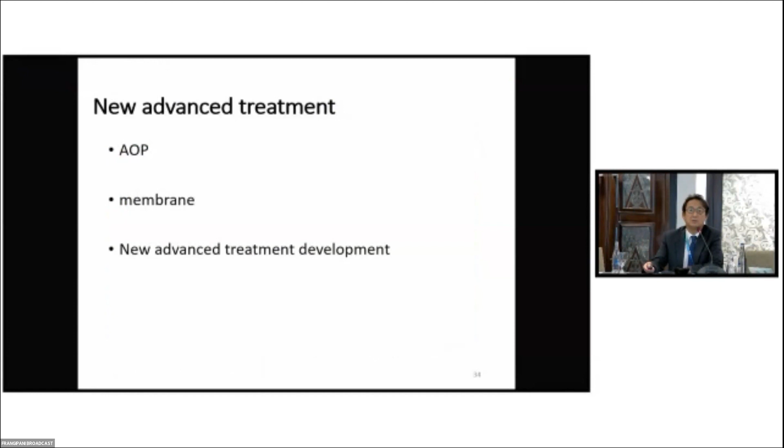And lastly, new advanced treatment. This is a worldwide trend, not only Korea, and I'm sure it's needed in ASEAN, and we can develop some new technology, and we can go for the larger market as well. For example, AOP, membrane, new advanced treatment development. AOP: there are some AOPs that can be used for conventional treatment.

I myself had experience. We developed a stainless steel plate, anodized the surface, and formed a nanotube. And it's actually an effective photocatalyst. We built them, and we did pilot tests in China and in Korea as well. So I'm sure Professor Lim and Professor Yang, your results can be tested together, and we want to see further development in this kind of field. And membranes, of course, we can do more for the development.

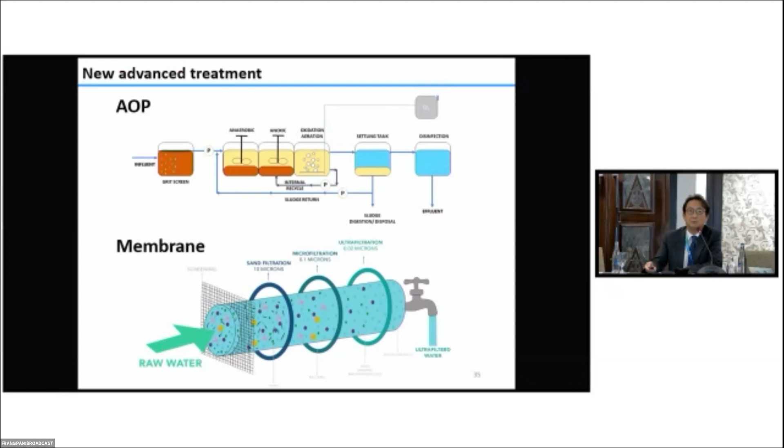So overall, the top 10 water treatment trends in 2023 said more startups are seen in this field. These fields are not new. These are the fields I just talked about. Actually, this means that we are on the right track. This can solve our problem as well as problems somewhere else. So hopefully we can talk about this later, and maybe next year when we further develop this water group between the two Asian institutes, we need to keep in mind where to work on.

Okay. But we have to be careful. These water markets are basically infrastructure. It's heavy. Once we have it, it goes 30 or 40 years. Also, the demand from public sectors is large and fewer. It's not like data science. It does not change in a day.

So we need more patience. Also demand from the private sectors, which is a little bit less large, fewer, but still big, still huge. So we need patience with a long breath, okay? And we need some sort of government incentives and support for new technology development and application. Since the chances are fewer, new technologies are very hard to get into the market. We need some help from the government.